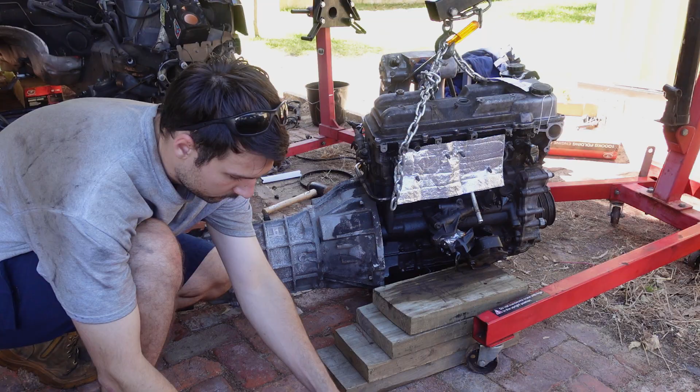So we're continuing on with the BMW build in this video. So if you watched the previous video, which was me engineering together the engine mounts for this swap, I hinted to the fact that I needed to manufacture and design a shifter extension to work with this swap as well, which is going to be what we're covering in this video.

So the gearbox that I'm using for this build is the Toyota R150 gearbox. So there's a bit of Toyota gearbox lore that we need to discuss before we get into me manufacturing this extension, because Toyota actually did have their own extension setup, which they fitted to a couple of cars. I believe it was the JZX100. But we're just going to touch on the 3RZ, which is obviously the engine I'm swapping here, the couple of gearboxes that Toyota fitted to it, OEM, and just a bit of history and discuss why I chose the R-Series gearbox. So let's get straight into things.

Now, something we have to clear up before anything is the fact that this isn't actually a Toyota manufactured gearbox. Yes, if you look at the VIN plate, you're going to see this is an R-Series gearbox, and there's a lot of other gearboxes that Toyota uses under different series names. However, the gearboxes themselves are manufactured by Aisin Corporation. This is a separate company that Toyota has part ownership or equity within. This is where most of Toyota and many other brands of vehicles' gearboxes get made.

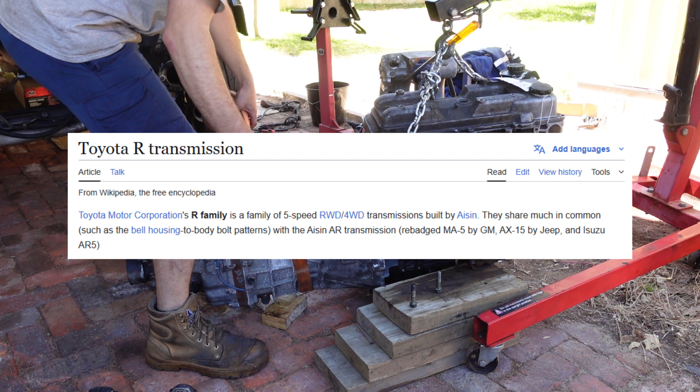It makes sense for a car manufacturer to get its gearboxes manufactured somewhere else rather than have to tool machine shops to manufacture alone for them. It doesn't make sense. It's just a waste of money. So the Toyota gearbox here, the R150 that I'm going to be using, actually has very many similarities, if not a mirror image of the Aisin AR5. So the Aisin AR5 is pretty much a later manufacture of the R150.

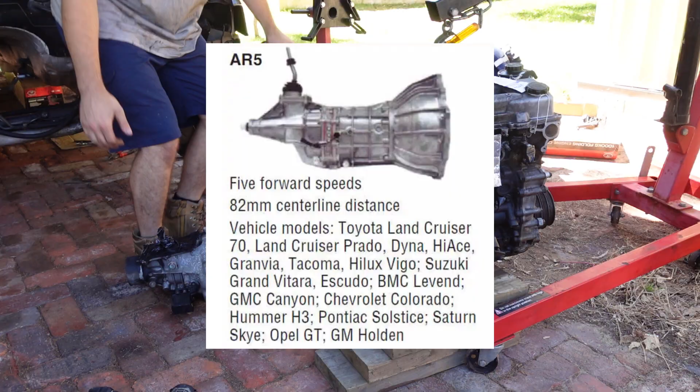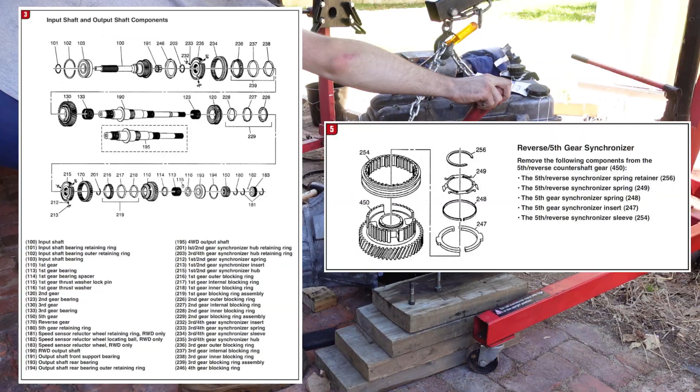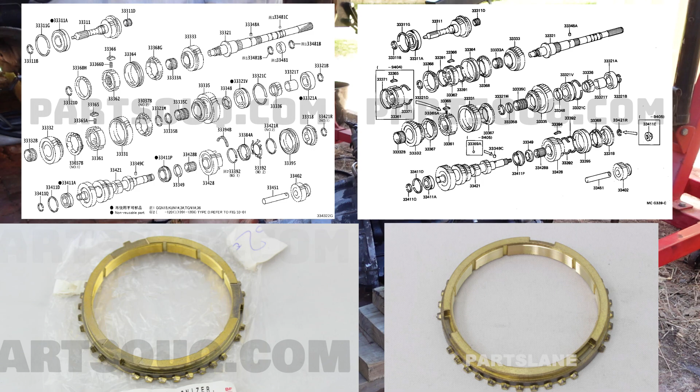It shares pretty much all of its common similarities with the R154. The guts of the box is pretty much the exact same as all of the R-Series boxes. What it does have is an upgraded synchro on 5th gear in a clutch pack sort of system. And if we compare this to the R-Series boxes, on the left we've got one of the newer ones. It has the same style clutch pack system for the synchro, and on the right is the old style R-Series synchro for 5th gear. As well as that, you can see here the synchros are of different designs, the old style being on the right, and the ones on the right tend to wear out faster and cause dramas, so it's good to get the newer style boxes.

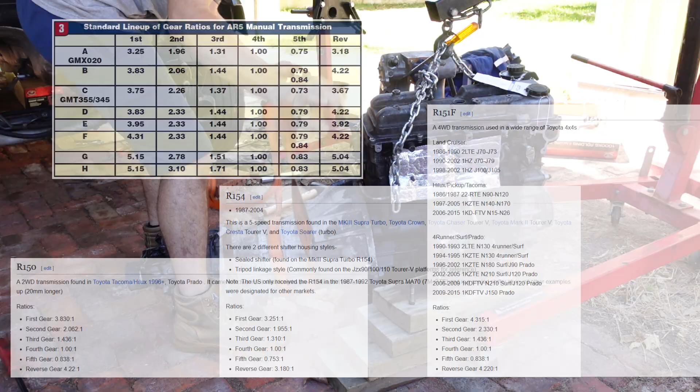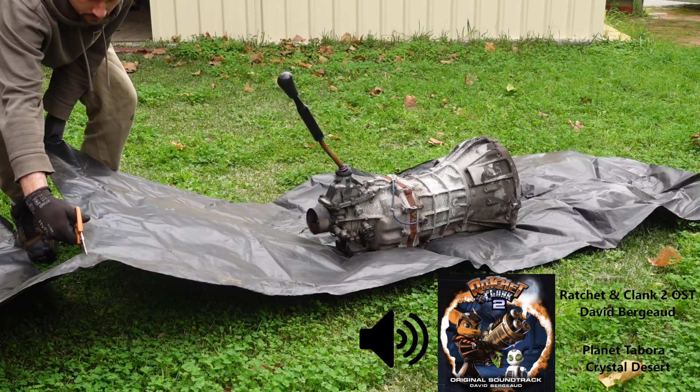The R150, which comes in the Toyota Tacomas these days, the two-wheel drive version, shares pretty much every similarity with the AR5, as it's a newer manufactured box as well. So as you can see on the screen now, I've got a bit of information relevant for the R-Series boxes. They all pretty much are in a big giant group of incest between each other, being related to each other in ways of manufacturing. When they have manufacturing lines producing updates on designs, they'll often just roll it out halfway through a year. There won't be a design change to the name. They'll just add this in, and this gets complicated when we're trying to talk about specific changes in design.

So as I mentioned already, the box that I'm using here is an R150 from the Toyota Hilux TGN16R. So this Hilux was manufactured between 2004 and 2015, I believe. The thing about this box we've got to keep in mind is it's slightly undesirable as far as gear ratios go. So first gear on this box is really short. That's because it's designed for a pickup truck, so if you're towing a trailer or you've got a bit of weight in the back, it's not going to bog down when you're getting going.

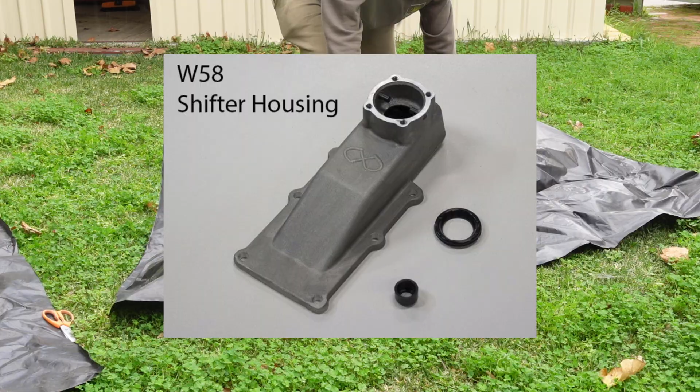So this R-Series gearbox just has the normal style shifter that mounts to the back of the rear housing of the gearbox. The R154 did come with an extended shifter, which is in a tripod setup, it's called. This is where the shifter pin itself is external to the gearbox through a sealed hole. There is also an integral or a fully sealed shifter extension style, which the W58 gearbox did use, and you can see here it's fully enclosed compared to the tripod style.

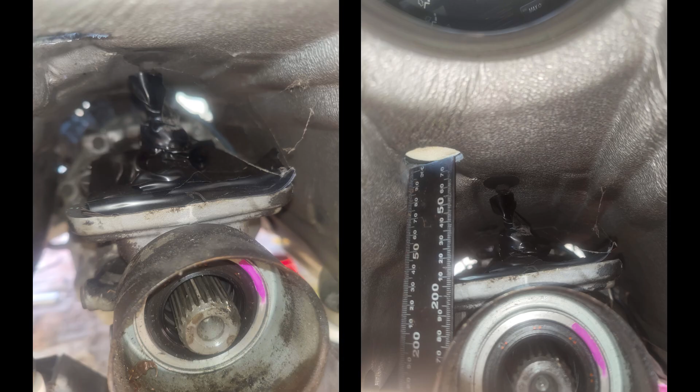So the next thing we had to do as far as the shifter extension went, had to mock the box up in the car and take every measurement humanly possible with as many photos as I could physically take, so that I was able to reference this when I was drawing up my design on the computer.

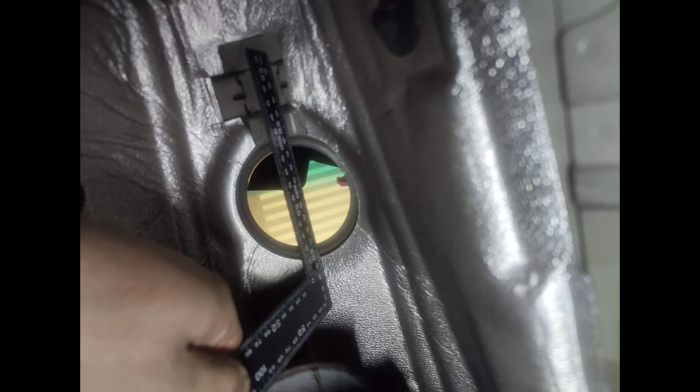This is because the box was going to have to be in the car for mock-up, and then it was going to have to come back out so I could take all of the measurements I needed of the shifter housing flange face itself. So there's a lot of critical dimensions here. We're going to talk about them a little later on, so you need to make sure your measurements are as exact as they possibly can be.

So realistically, if you're taking on this task, you're going to need to know how to use all of your micrometers and verniers and all of your special measurement devices that engineers and machinists are able to use. I take it if you don't know what a vernier is, you're not going to be doing this job. Don't get me wrong though, you don't have to be a brain surgeon to do this job. You could definitely engineer together your own system with a tape measure.

The thing is though, with any sort of design or iteration of a mechanical device that you put together yourself, there's going to be teething issues, and this is welds cracking, or issues and defects with the design that don't really show themselves until down the line. My main concern was me designing something that's going to be a bit slapdash, it's not going to work correctly, and I'm going to have to pull a gearbox back out of the car to fix it down at the track. This is why I'm taking such an effort to do everything properly to start with.

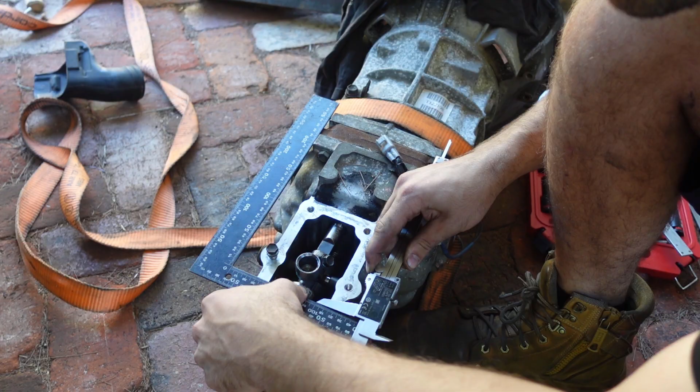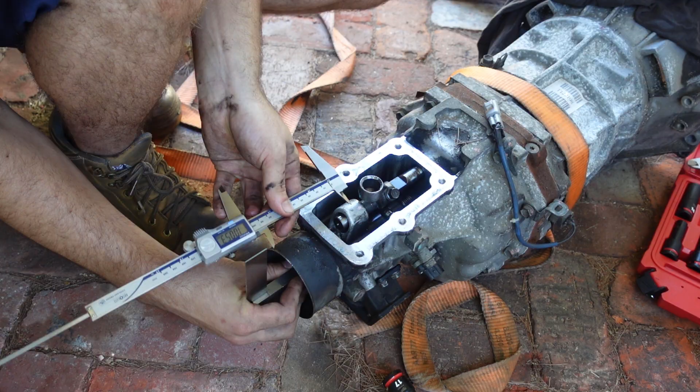I guess in an ideal world I'd be using 3D CAD software like SolidWorks, where you can actually model the stresses and forces that are going to be going through the piece that you're designing. But we're not going to necessarily need to do that for something as small as this. Because this piece is just going to be transferring the torque that I'm going to be generating by my hand on the shifter through to the rear housing of the gearbox, we can make a confident assumption on how big or thick the metal has to be and what material we have to make it out of.

So the program that I use for all of my CAD drawings is Wondershare EdrawMax. So this is a 2D program. I use it for all of my wiring diagram drawings and my P&ID drawings as well. It's really useful. I like this program because it utilizes both the X and the Y axes with grid references, and they scale it. So what this means is you can do scaled drawings, and it also has snap features, so you can draw things exactly as they need to be size-wise, and then you can scale it down.

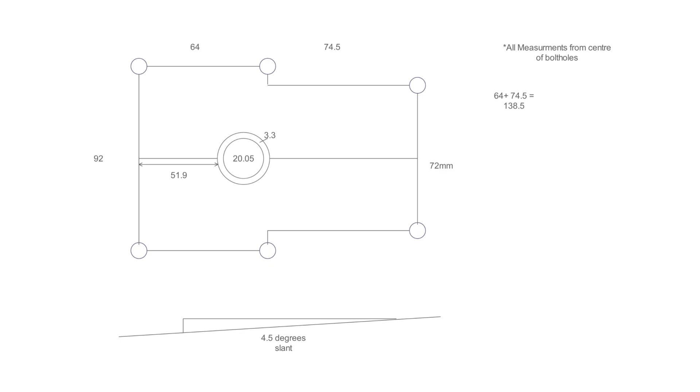So here's what I came up with for my first batch of measurements. So this is all of the bolt holes of the shifter housing mating flange, and you can see I took the dimensions of the shifter trunnion cup, I guess you'd call it. Now this cup is critical in how high it sits compared to the shifter housing face. This is because the shifter itself is spring-loaded in the top housing, and this means that it's going to apply a certain amount of force pushing the end of the shifter stem and the shifter bushing into the shifter trunnion cup here.

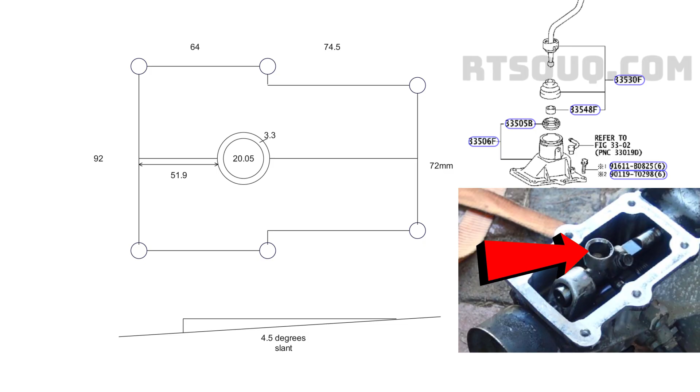Now, would this cause a problem? Potentially not. If you look at how the shaft that the shifter trunnion cup's bolted to is mounted, that's pretty solid, and you'd have to be applying a stupid amount of force over a stupid amount of time to be causing any significant visible wear there. I did end up keeping and using this top shifter housing here, so that's why I wanted to keep things as close to factory spec as possible.

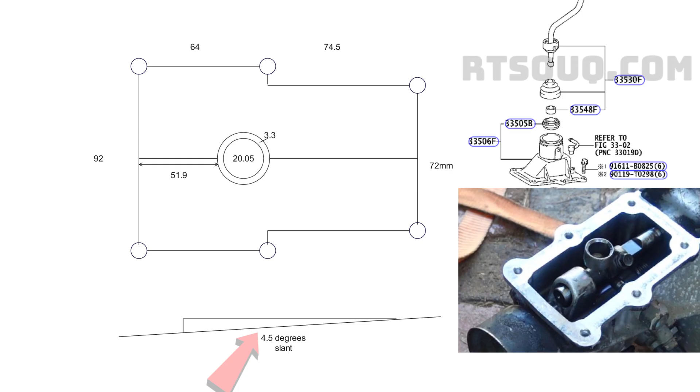The last thing to note here is the fact that this whole shifter housing mating flange sits on a 4.5 degree slant compared to the output shaft of the gearbox, so that's something else we have to keep in mind. Next I had to draw up the shifter extension itself.

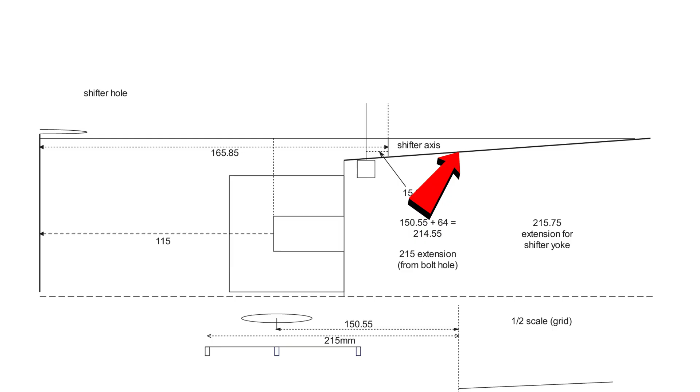So for my datum to calculate the actual extension length I was going to need, I based this off the back of the shifter fork actuator arm. Now because my plan was to create a shifter extension assembly that bolted to the top of the original mating flange, this flange, as I mentioned before, sat on a 4.5 degree slant. This would mean that the top shifter housing that I was going to retain was going to be further down the further back the shifter extension went.

And because of all this, I needed to calculate the thickness of the material I was going to need. This was going to be a critical dimension, so that depending on how long the extension was, the shifter top housing with the shifter arm and lever in it itself was going to be the right height to sit into the shifter trunnion cup correctly.

So that may have not made sense to everyone watching, but when you see me manufacture and get this system operating, you'll further understand what I'm trying to say. It's very hard to get across an imaginary design or describe it correctly. It's better to manufacture it and visibly show you.

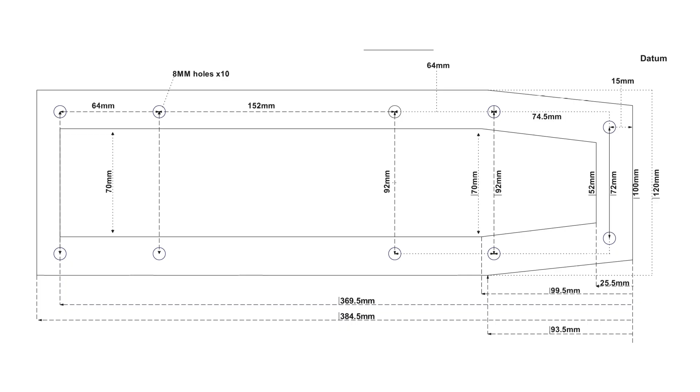So this here is the final dimensions for all of the bolt holes I needed. This drawing was originally one I sent to a water jet cutting company because I ideally wanted this whole piece punched out of 5/8 thick steel plate. But that was going to cost like $600, so I decided to make the frame itself out of square bar and then machine that to the right height so that the shifter would be shimmed up enough to fall correctly into the shifter trunnion, and then machine the bolt holes myself on the mill at work. So that's what we're going to see me getting busy with now.

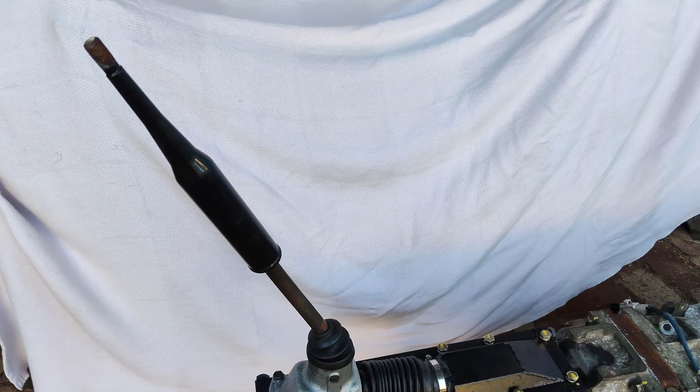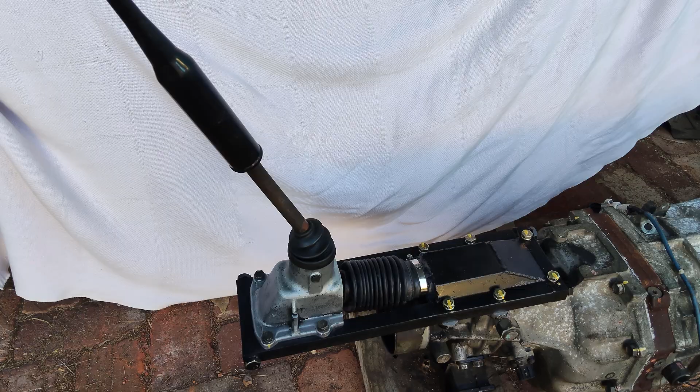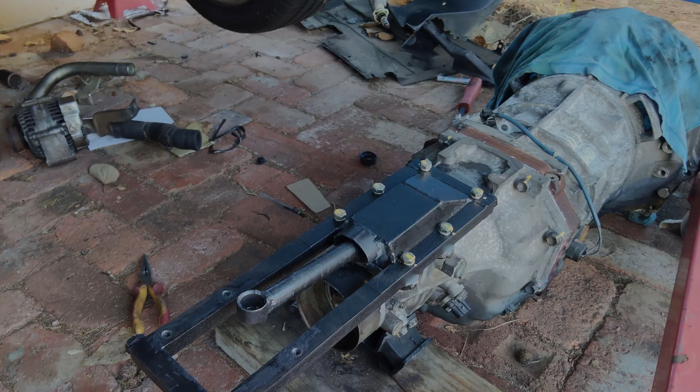So this is the completed revision 1 design for my shifter extension. Now, I'm sure a lot of people watching this are going to have seen issues in their mind as to choices I've made with the design and the iteration of this build. I'm not too concerned about it. I'm fairly confident this is going to function well enough for a long enough time to where I can be sort of happy and get a good bit of service out of it. Again, as I mentioned before, designing things and getting them implemented for the first iteration or the first revision, you have to expect there to be issues with the design, teething issues they call it.

Now, as this design sits, I have to pull the gearbox out to actually get the whole system off, and you do have to remove the rear housing of the gearbox as you saw to get the shifter trunnion cup knuckle out. Now, it isn't that much of an issue providing I can get a good bit of service out of it, but the fact that I cut, welded and extended the shifter trunnion, there is a chance that weld will crack, and if that does come loose, the car's obviously not going to be drivable because I won't be able to shift it. So that's a bridge that I'll cross when I come to it.

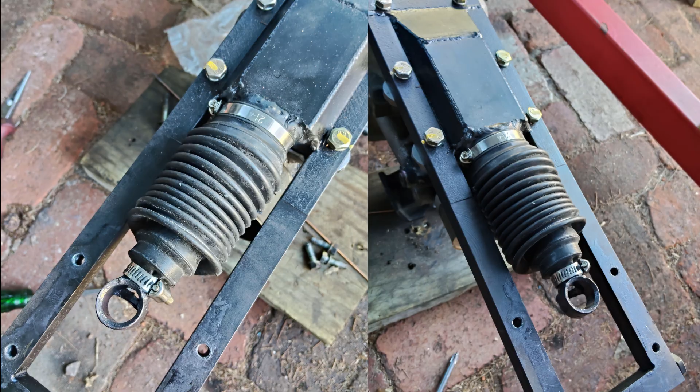I have got a lot more access inside the car now. Half the reason I did the shifter extension is because the shifter hole is sitting really far back in the BMW due to there being all of the aircon and stuff, which I've actually pulled out now, which you'll see in the next video. For the rubber bellows that I used to seal it up, this is a steering boot. It's a universal steering boot. I chose one of these because they're used to having grease or hydrocarbon based oils inside it, and they're used to a similar temperature that the gearbox is going to be seeing.

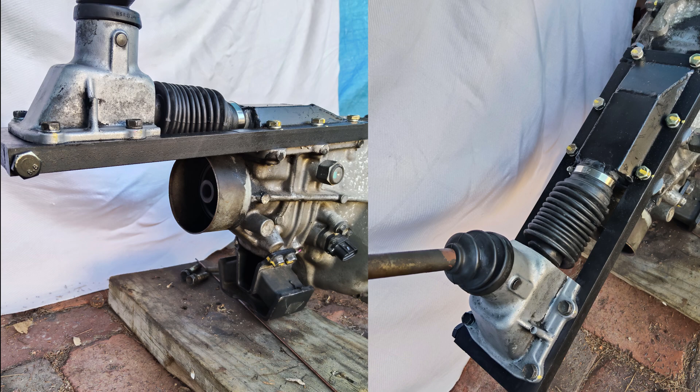So that's about everything I did for this video. I'm probably going to have issues with this as I'm trying to fit the drive shaft, because as you can see it does hang down a bit because of that 4.5 degree slant. But I'll be able to get around this. I can either just move the carrier bearing, shim it down so that there's more of an angle for the drive shaft, or I can just notch out the drive shaft or this here. I'm not too fussed. I'm pretty happy with this design.